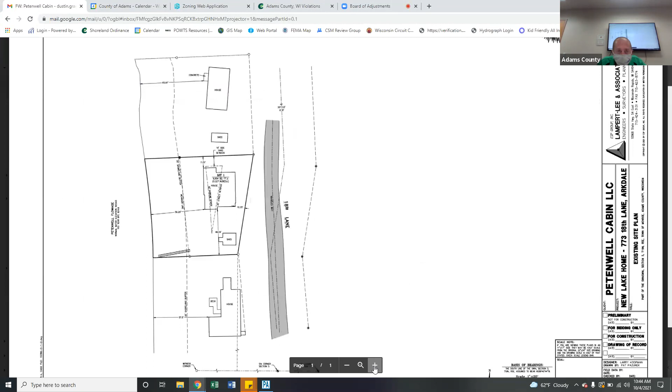I'll try to... Oops, I didn't do it on YouTube. Like that, no, wrong way. There we go now. How do I rotate this? Okay, I'm not going to.

All right, so there's the house. The road is on the right, and this is actually how it lays on the property; north is up. So the request is 56¼ feet to the ordinary high water mark of Petenwell, and on the roadside it would be 10 foot from the property line, or 10.25 feet, Dustin.

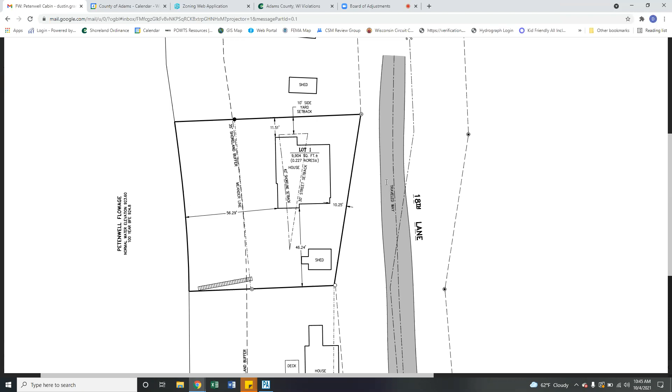Yes, can you hear me? This is Larry. That is the plan that you have up there, which is what's there now, Dustin. The next sheet is what's being proposed. Wasn't that the same? No, there were 3 sheets that I sent to you. This is what's there right now. There you go. Oh, my apologies.

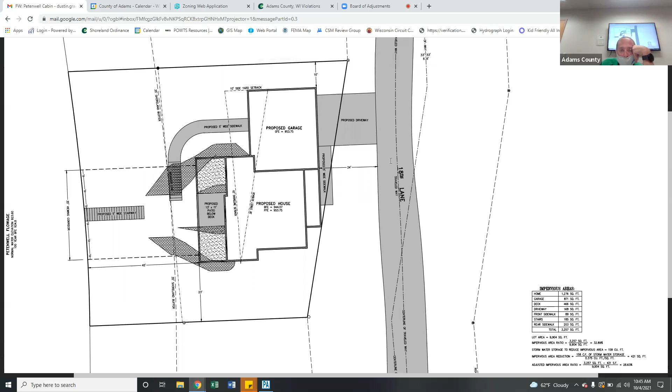So we're looking at 45 feet to the ordinary high water mark. And is that 24 feet to the edge of the pavement or to the center of the road? That is to the edge of the pavement, Dustin. And we are showing on this plan a 0-foot setback from the right of way itself.

But when we went to the town of Monroe, they asked us to chop off a triangular or rectangular piece off the southeast corner of the patio so that it would be a 2-foot setback. Petenwell Cabin LLC is in agreement that they would do that. All right, so we will need to, at some point, if you guys so choose, amend the application to show that.

So the variance part is because we're too close to the road and too close to the water. The shading on here is where they'll be doing excavating for a walkout basement. The slopes are a little bit on the steeper side. What were the exact numbers on the slope? Did you get those? It is probably about 1.5 to 1, very steep.

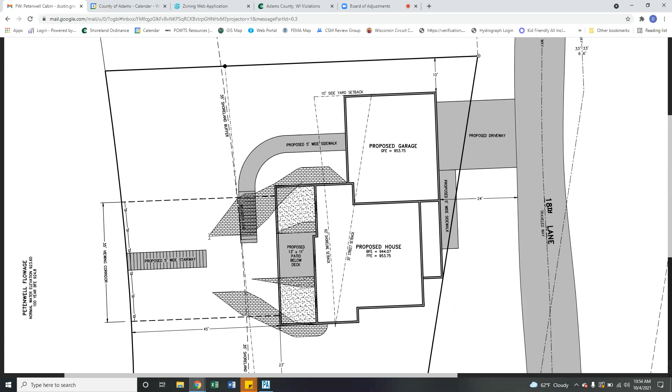Like how much is being cut out? The area being cut out starts at the full width of the house on the water side, then narrows as you approach the 35-foot shoreline buffer strip. We are proposing to excavate about 10 feet into the shoreline buffer area to get the slope, so we have some positive drainage away from the walkout doors in the basement to where the stairway going down to the water would start. And what methods are you using to hold back the sides of what you excavate out?

Mr. Chairman, I would propose we have a site inspection. Two things I would be concerned about, elevation, site inspection, three things actually. And the fact that the town gave this information, but we don't have it. Right, and we're approving something on hearsay.

It does mention in here what material we're using. Oh, it didn't, somewhere I read it in the notes. There's quite a bit of correspondence. Yeah, went through that. Using terra-like vegetated retaining walls to avoid impervious surface issues. It's on the page, what is it? 5/8, 5/8.

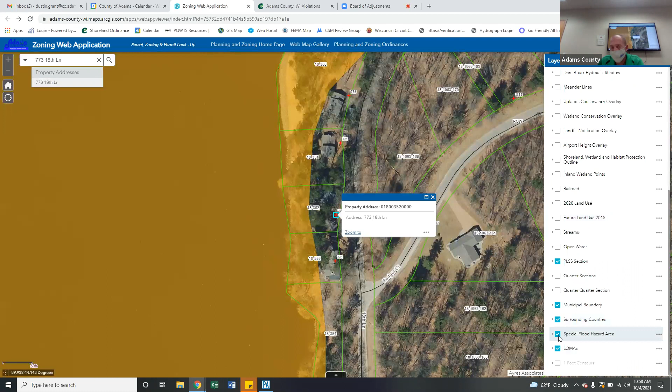This is as large as my screen's gonna get. So this property is the one in question, and you can see the existing house there. The new house, I believe, was 9 feet closer. The house to the south is lined up, you can kind of see they're all right in line there. Is it a line of sight thing? Currently, I'd say it's pretty close to that. The one towards the north, you can see the road does angle off a little bit, so that's why they were able to get a little further away.

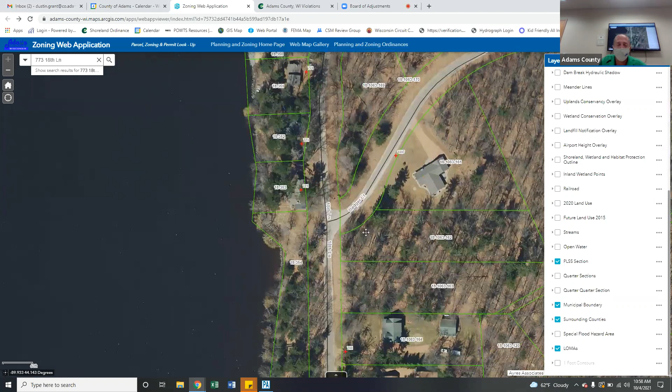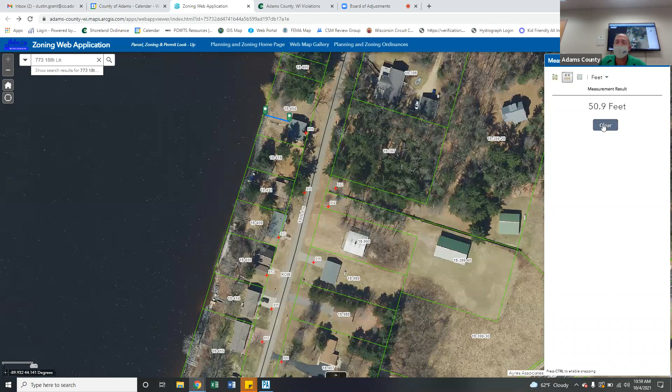If we go down a little bit here, you start getting into all these houses that are all tucked closer to the road, and those are all approximately, like this one is 50-ish feet. That's precedent, a word I'm not supposed to use. No, a precedent means just because you say they can be at 50, you have to approve the next one at 50 -- that is not the case. The situation here is what I was showing with that one drawing. If the board does not grant a variance and they want to build a house, the only house they can build is in that triangle.

So their house could be about 4 feet wide. I'm with Robert. The setback to the road—it's the setback from the water line that is concerned. That's my concern, it's all of our water.

Does that impact the size of the house, Dustin, by setting back to the 75-foot high water mark? They wouldn't be able to build. Because this line here—well, that's not even, this line here is 62 feet from the water. So 75 is actually 13 feet further back. They put it through somewhere right in there.

Now, correct me if I'm wrong, Dustin, but it's my impression that the property was purchased after these rules and ordinances were in effect. Is that correct or not? Yes. Then it's a self-imposed hardship, and that's a decision the board has to make. Each member, that's part of your decision on how you vote. If you feel it is, that's how you vote.

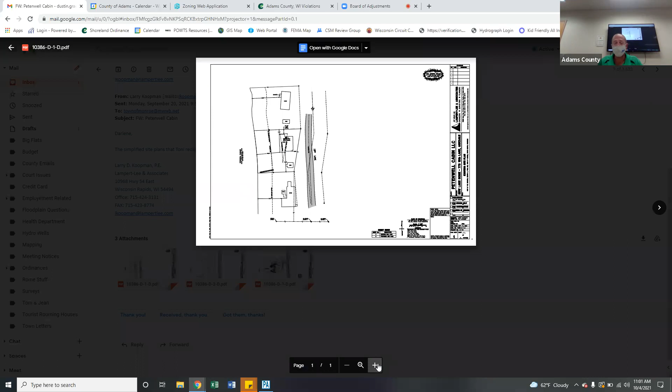The other thing I did show, there is an existing cabin on the property. That's what this is. Is the town of Monroe, any objection? No, I received—that's why I showed, they have no objection. The only request they had was instead of 0 foot to the property line, go 2 feet.

What about the DNR with the setback? They don't police the lake.

Can I add a bit of information? We had a really good conversation with Tony at the township, and they actually went out to the site after we had made the first proposal to take a look at it, which was very nice of them to do. The only thing they really had to consider or wanted us to make a change to was that front porch.

But I understand we are asking for that variance for that setback, and it's not a big cabin. The footprint is basically the same size as the current cabin, but we had to move it because of the setbacks for the well and the holding tank and such. So after everybody tried to move and replace this cabin on this lot without having to use that little bitty triangle, what you see now is the result. We really did want to work with everybody as much as possible to get this rebuilt into a usable cottage for us.

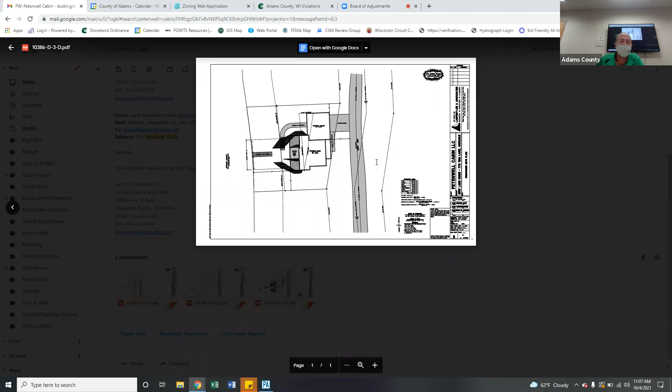So I'm going to give you an example. I don't want to drag this out, but when I built my house, I went back 75 feet and was 20 feet back from the house next door to me. The county came out — this was 19 years ago — and we had to stop footing construction and move the house forward so the line of sight would agree, so you don't have two houses out here, one back here.

They wanted to keep Lake Shore uniform, and this is probably what they're looking for here. You can't throw this thing back 75 feet when the guy next door on both sides is only 45 feet. So if Dustin can get a video and give us a line of sight as to what's there, it would be much easier for us to make a decision.

I would like you to rescind your motion, and I'd like to make a motion that we table this until we are able to view the video and make a determination as to the setback from the water line. The town has already approved the setback from the road, that's not an issue.

I would like to have in your motion, if you don't mind, that he reconsider his request for the setback and go to requesting the minimum, and be part of that.

First of all, I'm gonna ask a question. There's an existing house there. And what is it set back from the water now? It's way back in the corner. Is it, 50? See that little square, that's the house that's there, this is the existing house. It's 56 feet to the ordinary high water mark.

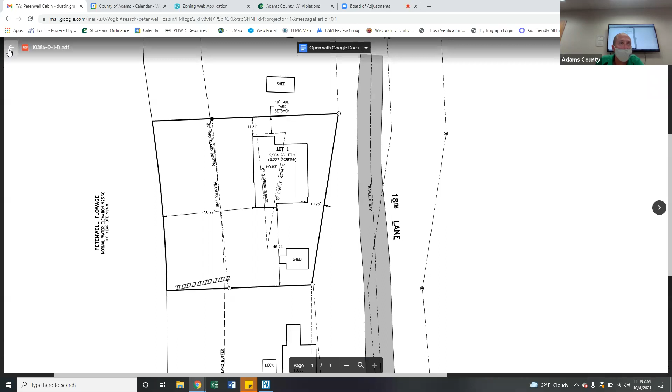Okay, and what you're saying is you want to be even further back. Well, that's the existing house. That's right, not from the existing. No, but the existing house is only 56 from the water mark. What I'm saying is you ask for something, and if you sit down and think about it a while, maybe you can take a little less and still be happy with it. That's... yes, well, actually moving it back about 10 feet.

Pardon? We're moving it back about 10 feet, if you go by what he wants, like that. Correct. No, I think part of the issue too is when they moved this around was where they had to put the well and septic, and that made them push the site for the cabin around on the lot also.

I know we had to go, and in the survey, they had to go on the neighbors and plot where their wells and septics were. And then they moved everything around on our lot a little bit to make sure we could get our well in that was away from their septics. So I think that was part of the other issue with this lot.

You can see my screen, correct? Yes. What is the square footage of the proposed construction? Is it 944 on that floor? Yeah, 944 for the house and then 953 for the garage. Okay, I believe that's right, it's on the one drawing, well, this drawing anyway.

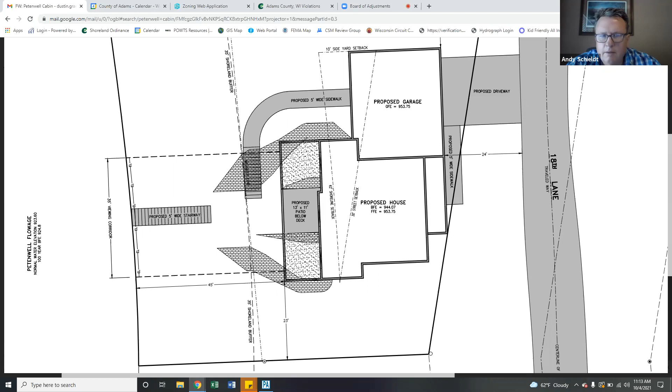It does say proposed 13 by 11. So if you take that as 11, that puts the house at a 56-foot setback, which is the same as the existing current house. In my head, that would make sense, yes.

So really the 45-foot setback would just be for what we think is a retaining wall. Yep, and the deck. Correct, yep.

I think we might want some clarification on that. That small triangle you're looking at, Dustin? Yeah, what is that? That dashed triangle is the only building envelope on that property. Yeah, but I'm talking about that shaded area, and then there's this. Yes, those are retaining walls.

That would be next to the patio door. So whatever that system is that's in one of the emails you mentioned is what'll be there. Those are those Envirolok bags. On your at-grade patio, the water from there goes where?

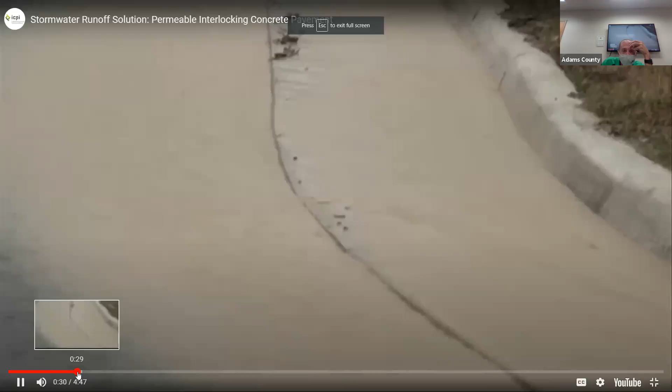Okay, so there is a motion though, to reconsider the plans, and I would suggest adding in there to more clearly identify how far the house will be.

That's your motion, kind of a combination of both. Right, you're gonna get a line of sight, which would be part of the video. He's gonna make a line of sight video so we understand what the houses in the surrounding area, what their offsets are.

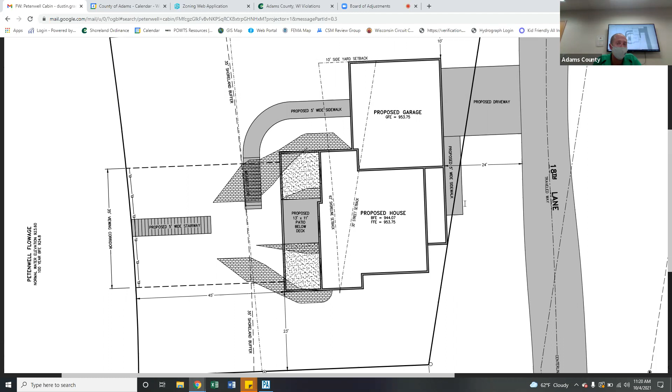I believe Larry, I wish he was still on the line. Actually, Larry's calling me right now. Hello? He has the information on how close the neighbors' houses are. Yeah, that would be helpful, because he did that as part of the site plan. Dustin and I discussed that.

Dustin, can you unmute Larry? He's in the room, who am I unmuting? Oh, he has his hand raised. Okay, I'll hang up, Larry. It doesn't show that he's muted. Oh, hold on. Larry, are you there? We're looking at him but he's not talking. No, that's the owner. Okay. Somebody just joined with a 715 phone number. Can you unmute that one, Dustin? Well, all I can do is ask to unmute.

Larry, if you're there, 715-424 and then some numbers, to unmute you hit star 6. Dustin, I'll see if I can call him and hook him in through my system here.